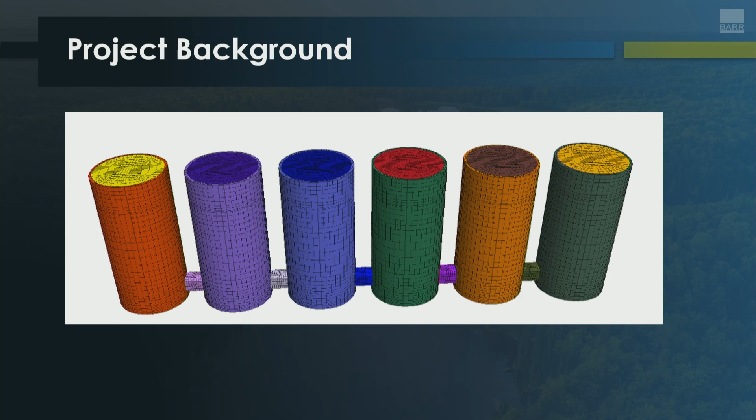So Stormwater Storage Facility, SSF, what is that? Essentially, this is a hydraulically driven project. Some of you may have heard this morning, another colleague, Brandon Barnes, gave a presentation on a project out in Valley City. He was a key component of this project team as well, but this was a hydraulics project in the downtown Minneapolis area, with the client being the Minnesota Department of Transportation.

So where is this project we're going to talk about? It's just south of downtown. You can see in the image here, downtown Minneapolis circled in the background. This is looking north, straight up the I-35W corridor, which is a major commerce and commuting corridor for the Twin Cities. Lots and lots of traffic on a daily basis.

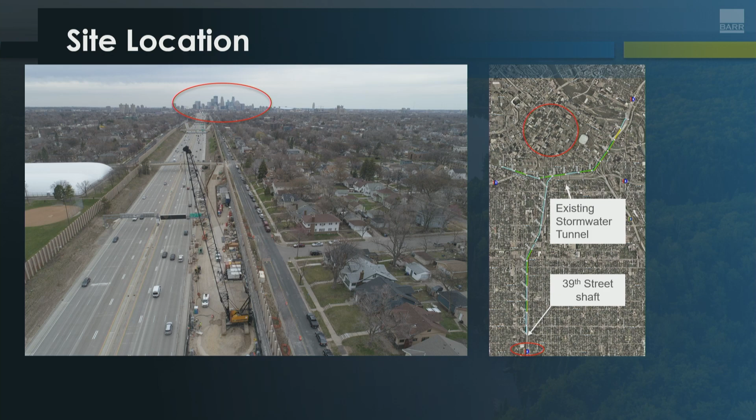How the system handles stormwater is, any stormwater is collected in a near surface system south of 39th Street, and then once you hit 39th Street, there's a series of deep shafts that convey through a deep tunnel out to the Mississippi River in a direct route. And so our project is just south of that 39th Street shaft, where there's a low area in the highway alignment. It's a very constrained space.

The great thing is that when you fly into MSP, if you're coming in from the northwest, you get a great view right down that corridor. Some pictures we've taken on the plane give you an idea of just what that corridor looks like. And then that picture on the right, that was during construction. This is a very constrained space.

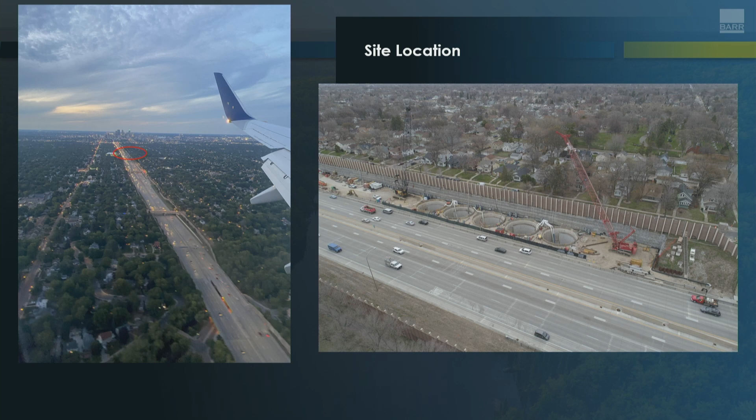But essentially the root of the problem was that this watershed drains during precipitation events, and under certain circumstances or certain magnitude of events, there is a potential for flooding along the freeway. And that flooding can bring highway traffic to a stop. This drainage area is a little over 5 square miles, and most of it can drain just fine. There's a piece where the project area is where we have issues with the amount of storage that's available.

And Federal Highway had told Minnesota DOT that they needed to have about a 10-year, 24-hour magnitude event storage. And we came up with a solution that was a little bit less than that. We'll talk about that, but it's important to remember this is a hydraulic project. On the left side here is the discharge out to the Mississippi River.

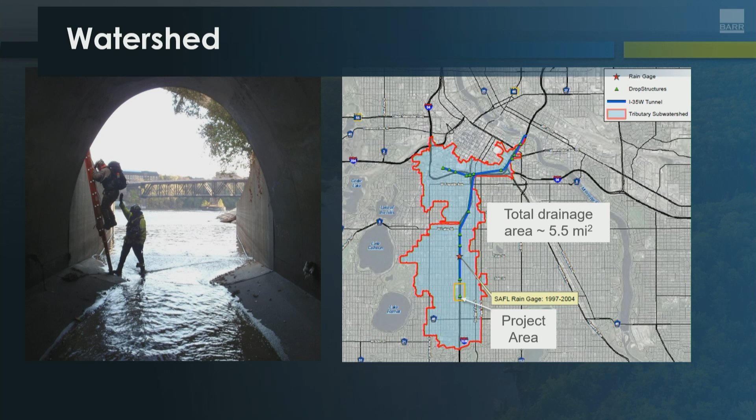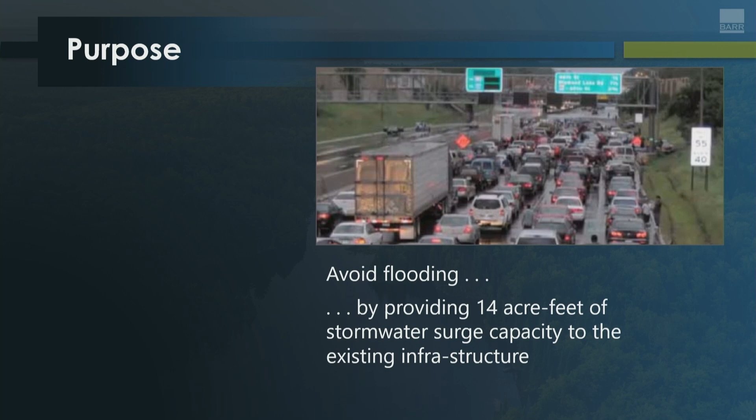And so what are the impacts of the flooding at this location? Total gridlock. And this doesn't happen all the time. It doesn't happen every month, but it does happen on a frequent enough basis in the past that it was a major issue. And like I said, the original intent was to have enough capacity to take a 10-year, 24-hour

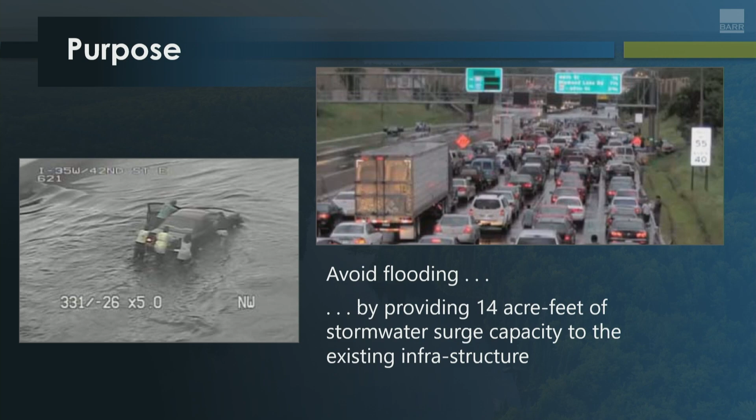event. What we did and what we came up with as a design team was to have 14 acre-feet of storage in place. 14 acre-feet is about 4.5 million gallons of water, or roughly a little over 200 swimming pools worth of storage. So the whole intent is to provide some of that storage capacity when storms hit in the right magnitude to prevent some of the impacts that historically have happened with traffic.

What this looks like in concept, this is it. You can't see it anymore, it's all underground, but essentially it looks like it's 6 sequential shafts that are interconnected. And when you look at it, that pipe that's in the median there, that's how current stormwater is carried to the north, to those deep tunnel shafts. And essentially there's a diversion that goes through the first cells. We'll refer to the cell on the south as cell 1, on the north as cell 6.

And so when water comes through under normal conditions or low water amounts, it passes right through that low area. It continues on in the median. But in storm events, what happens is when that water hits that first cell, cell 1, it hits an elevation that will go through a double-sided weir and spill over into the cells, the shafts, and essentially fill equally across the way.

So this sort of project presents a number of geotechnical challenges. A hydraulic project for the need, but there's a lot of geotechnical challenges, and there's a lot of need to understand how do we manage those things through design and through construction.

Minnesota DOT has a few different types of alternative delivery. They have CMGC, Construction Manager General Contractor, and they also have design build. And so on major projects, a lot of times they will assess what sort of delivery do they want to do if it's not going to be a design bid build. In this particular case, they decided to go CMGC. And the reason they wanted to go CMGC was because they really needed a team that could collaborate through options

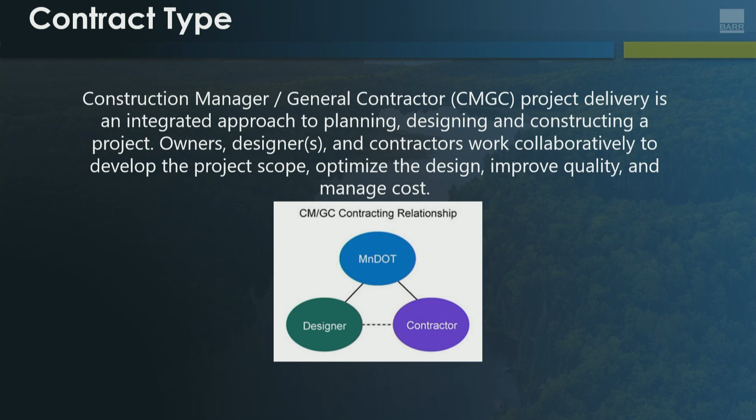So that was the delivery method they chose, which meant there was a very collaborative spirit. You'll hear the word collaboration thrown around a lot with alternative delivery. For the CMGC project, we had MnDOT as the owner. It was a joint venture of Kraemer Construction and Nicholson doing the contractor side and providing early contractor involvement. And then the design team, where the key partners were Barr and TKDA and Brierley Associates.

A number of third-party stakeholders had to be engaged with this as well, and not only engaged during the design process, but also some of the monitoring was to make sure we weren't negatively impacting any of the third parties adjacent to the project.

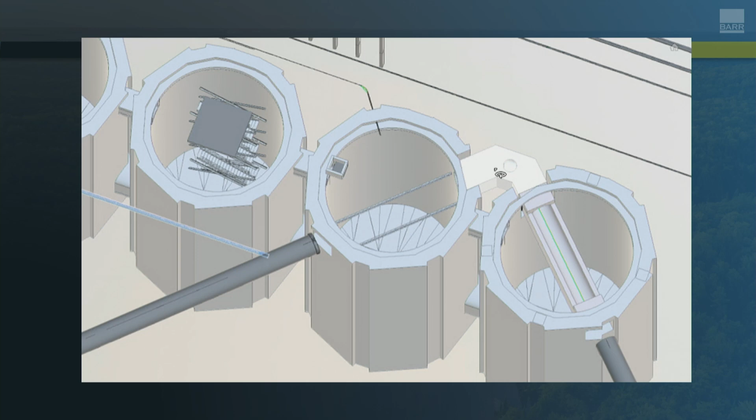These cells are about 90 feet deep, 42-foot diameter, and they were constructed through diaphragm wall construction techniques, which we'll talk about in just a second. And then they have an interior liner wall as well that was cast in place. So they're extremely robust, which Joel can show on some of the data too.

So as a geotechnical engineer, now that we've got some of the background, the other piece that's important to understand is the geology of the site and the geology of the Twin Cities and how that impacts control of risk, decision of constructability of the site.

So when you look at the typical layer cake through the Twin Cities, there's glacial drift, glacial alluvial deposits that occur up top. Then as you go down, the first bedrock you will oftentimes hit, not everywhere, is the Platteville limestone. Serves as a great competent layer when you first go down. And then beneath that limestone is a thin layer of Glenwood shale, which is an aquitard, and then you get into the St. Peter sandstone.

And when the cities of both Minneapolis and St. Paul were first developed, that St. Peter sandstone is heavily, easily erodible. It's very strong in compression, but very easy to carve out or to mine or to dig tunnels in. And so when the city started to get built up, it was very elevation, gravity beneficial to handle stormwater, to dig out tunnels and have those come out to the Mississippi River. So most of the stormwater drainage systems in the Twin Cities are like that.

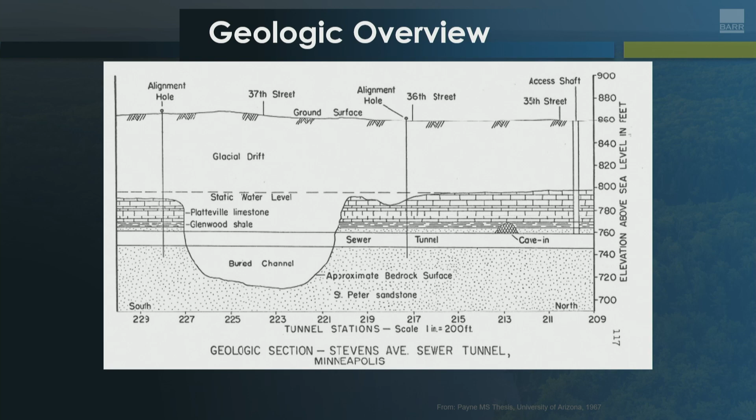But a couple of the things that are important is that where you construct in the St. Peter, when that Platteville's there, it serves as a good carrying unit, but you get these glacial carves, these valleys. And when you get the valleys, you get intermixing of the groundwater table, and you get some different soils than what you expect that drive a need to identify that.

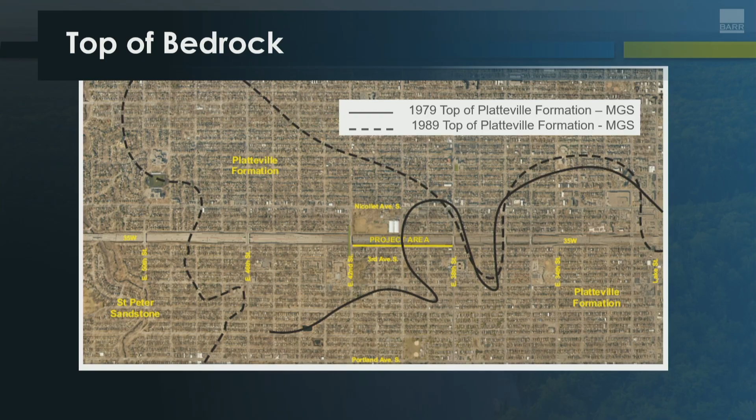And what we had was from '79, we showed that the top of the Platteville limestone came right through our project, and then that map was revised. In '89, it showed that all of our project area would have that Platteville limestone. And so when we did our geotechnical investigation, that started to dictate what we thought we were going to see and how we are going to shape out our cells.

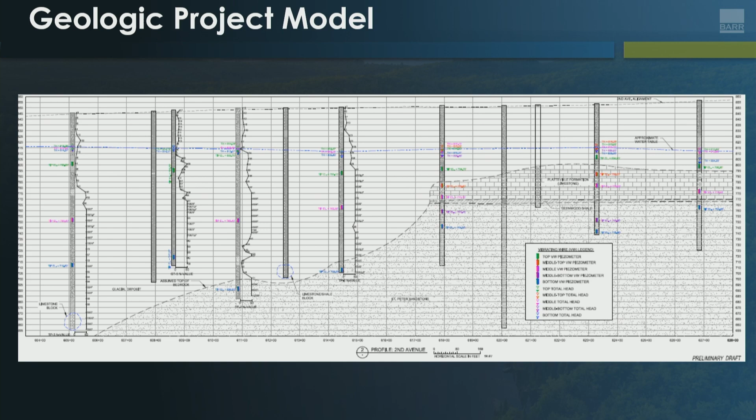So we had very high groundwater table, and dewatering this to completely dewater the excavation or whatever it was going to be was extremely impractical. So we knew we were going to have to construct in a high groundwater table.

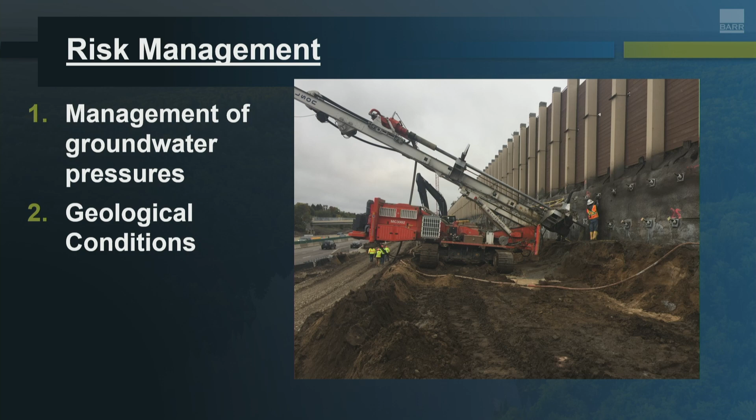There's a number of different things with regards to this project we could talk about for risk, but the two that I'll lay out and kind of set up some of our instrumentation is management of the groundwater pressures. Like I said, high groundwater table, we weren't going to get rid of it, totally impractical, too cost prohibitive, and then the geologic conditions and how that impacted the constructability or the construction technique we used.

Excuse me, this is a schematic of the different steps of construction. So when we were talking with the contractor, we did decide early on it was going to be some form of diaphragm wall construction. All that is, it allows us to build from a platform, dig straight down with a large cutter head, and then slurry that in place and essentially create the walls underground. Serves as a cutoff, and then we can excavate out the interior soils.

But along the way is control of the groundwater pressures as we go. So high groundwater table, you can see on stage 2 there, that's really building the diaphragm walls from the surface, so those are in place.

And then when we get to stage 3, we wanted to put wells in to depressurize, not completely dewater, but depressurize to a point where we could control excavation and sequentially do that in a safe, effective manner. Phase 4 is when we're doing that sequential excavation. And because of the risk on this project, there were some terms written right into the contract that required the contractor to achieve a certain amount of depressurization before they could continue along with their excavation. So that was one way we were handling risk.

Stage 5, we get to a point where those wells are turned on, and we really need those to be on constantly before we get to the bottom of the excavation. As I mentioned, the cell open area is about 90 feet deep. Those diaphragm walls are about 110 feet, so we had a bit of a cutoff effect on the bottom that we were utilizing. Get to stage 6, that's our critical point in the project from a risk standpoint. At that point, the wells have to be on. If the wells are not on, we lose control of the hole. We would have heave in a very quick fashion at the bottom of the hole, and so there were a lot of redundancies built in there.

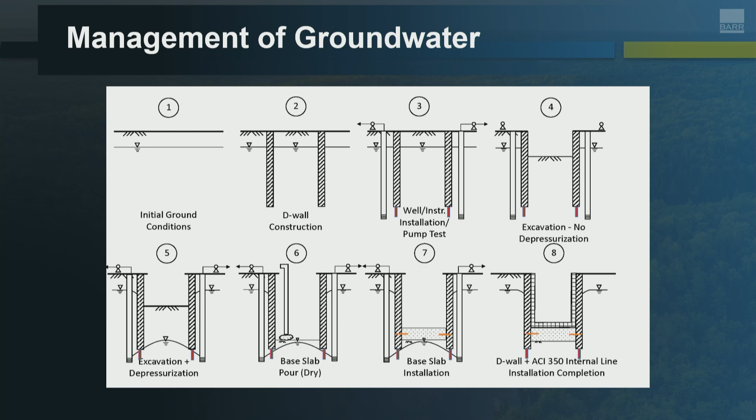And then stage 7, we cast in the slab that structurally supports those pressures. And then 8, we come up with some liner walls. So that was the sequence of construction. But knowing how the water was behaving during all those things was incredibly important. So what do we do about that?

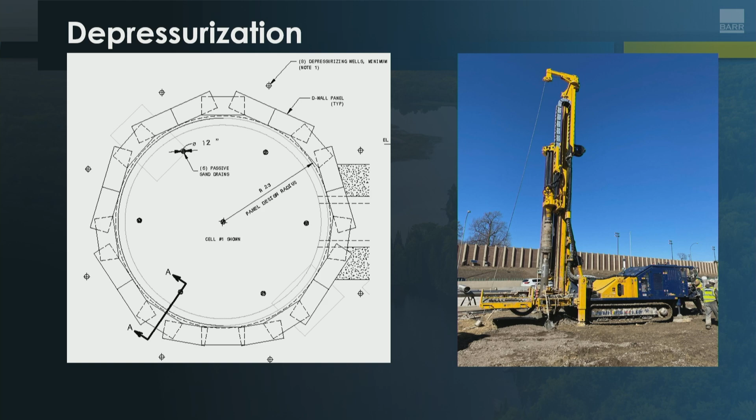We had a system of depressurization wells. And so after the diaphragm walls were installed, there were wells put along the outskirts of each of those cells. And then we had a number of pump tests, and the contractor was required to perform pump tests before excavating to show that they were performing. They did have to redevelop some of those wells along the way, and on some occasions we had to add another pump on the interior of the cell just to create enough control for the contractor. But this was discussed ahead of time.

Once the wells were installed, there was a need, because of the risk component, to make sure we had online backup power, so that if there was ever a storm that knocked out mainline power, there's an automatic switchover to generators to be able to power these things and not lose the construction at a critical point. That was all identified during the design phase and then costed out by the contractor and the owner together through their costing process for that delivery method.

Specifically for the depressurization, I mentioned we had that in the contract. It's the first time I've seen that, where we had specific depressurization goals that the contractor had to show that they met before they could continue with their excavation sequencing. So everyone was extremely interested in the instrumentation of the dewatering, and we had a multitude of vibrating wire piezometers at the tips of these different cells, so we had redundancy in the system, and then we had the data actually hooked up so it could be viewed externally by all the stakeholders, and there were times when they might lose just one pump or something, and we might see it on the monitoring before they realized it on site, just because the response was so fast given the amount of head there.

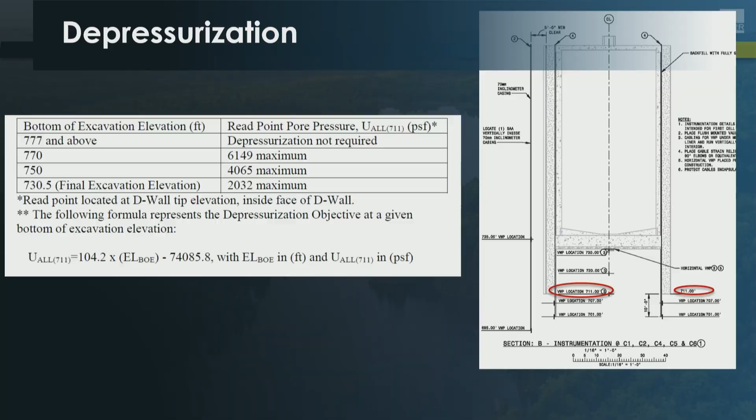The truth test was when they got to the bottom. This is a picture of when the bottom was completely excavated out, and the floor was not in yet. And so, as an experiment, the contractor wanted to see how fast the water comes up if some of the pumps start to lose. And they had control and they had redundancy, so we could do it in a controlled fashion. And I would say it was probably within 20 minutes you could start to see water seep up. So they turned the pumps back on. It gave everybody a good sense of what sort of time they were looking at, and it was a great test to confirm what those risks were and have the instrumentation tell us everything that we thought was happening was indeed happening.

So then the other thing was the ground conditions, and how do we fit these cells into the ground in a meaningful way and have a construction sequence that allows us to manage that. You can see from the aerial drone footage, this was immediately adjacent to live traffic, and there was a major construction project going on adjacent to this one, and so there were a lot of interactions between those projects.

Early on through the design phase, the contractor identified, and we talked about whether we wanted to have shared walls between the cell walls, because you can do that. We made the decision to not do that because it would allow us to sequence more effectively as we jump from cell to cell without having that longer cure time and some of the limitations if there was a little bit of differential settlement. It wouldn't put as much risk back into what a shared wall would be.

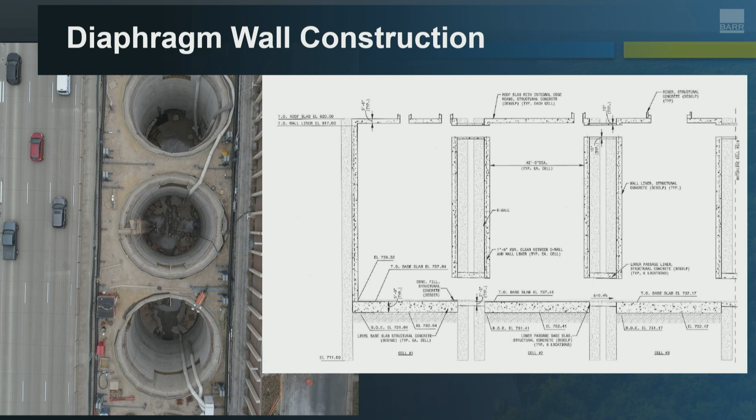So the decision was made, separate them all so they're independent structures, they can carry the stresses of the soils fairly well, and what that meant is we had to make connections between those cells, and we had a connection at the top and a connection at the bottom. But before we even put in the diaphragm walls, that meant we had to jet grout. So the contractor came in and jet grouted to try and precondition the soils, and then once the cells were constructed, we hand dug between one cell to the other. That was an efficiency, a risk control that was identified through the design phase.

The diaphragm wall construction was really done through a couple of techniques. There's a clamshell bucket, where you can pick up softer soils and excavate, and then you have a hydrofraise, which is multiple cutting wheels that will actually grind away at denser material or rock, and then you put a slurry in. Slurry holds the slot open, and then you can tremie pump concrete in there to create that exterior wall. And so those are the methodologies used.

It worked out great because it allows us to work from above that groundwater table, but get a high level of control on the type of concrete that we're using and the curing of it to know that our walls are going to be good.

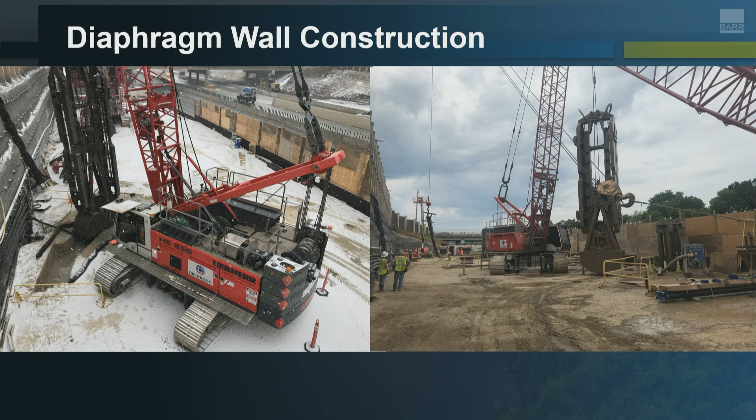Side note, COVID hit in the middle of this project. The crews that operate the hydrofraise are very specialized and there was a little bit of a delay on the project because one of the crews was in Europe and could not get back to the U.S. to work on the project.

But to give you a sense of what this looked like at the bottom when we made those connections, you can see some of the jet grout on the left. So jet grouting, we're drilling down and injecting grout before anything else is done to try and solidify the soil and create a little bit of a water cutoff. You've got to remember, there's about 80 to 90 feet of head above where this is at. So we didn't want to have the diaphragm wall in place and then poke a hole in it and lose all this ground. So that was the reason for the preconditioning. But we were able to punch through successfully, control the water inflow, and then do cast-in-place connections.

The other thing that was a part of this project was, you see these openings, they're about 10 feet wide. Oftentimes you get sediment in a storm structure like this. So we worked with MnDOT maintenance to identify how we can get sediment out in the event that it comes in there. So all the floors are sloping to the middle, and then for all of the 6 structures, there's a slope that goes to the north. So we're trying to consolidate where any of that sediment would come. In the event they needed to, there's access. You could drop an electric or gas-powered skid steer in there, and those widths are there to allow for passage of some of that maintenance equipment.

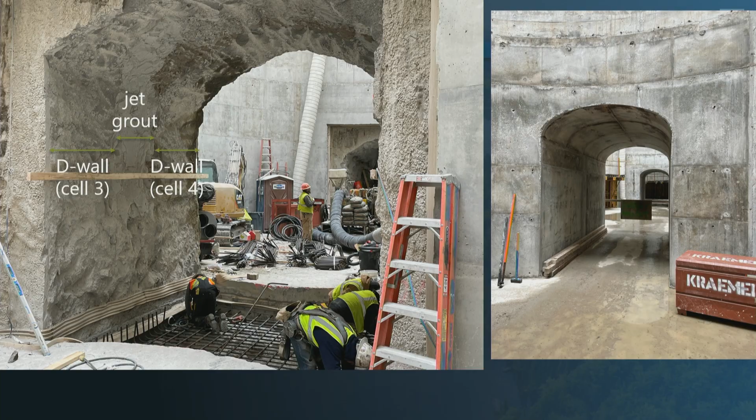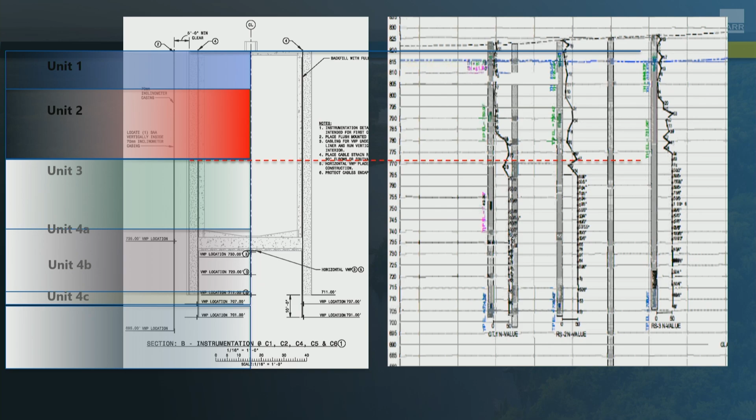And then beneath that, we got into much stiffer alluvial soils. And so that was the identified transition to go into the hydrofraise and do the excavation with the hydrofraise at that point. And that allowed the contractor to figure out what that efficiency was going to be, what the costing was going to be for each of those things. And that concept model carried all the way through the costing exercises and the risk. Along with that was trying to identify, are there boulders in there?

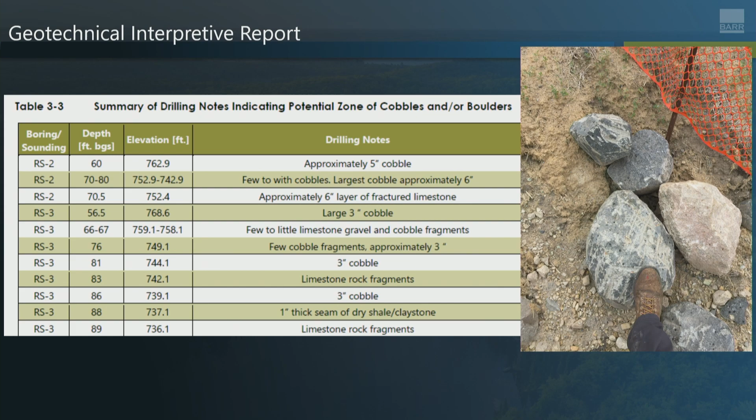Even with all of the best planning, there's still things that come up, and so how do you get through that? So those are two of the things from the standpoint of risk as far as conditions encountered and conditions planned for and designed. What did that mean on the contract side, especially on CMGC delivery? So this was a diagram we worked up just to try and lay out how it was handled on this particular project. And you can see on the investigation side, or RID, reference information documents, all of our geotechnical information, some of the baseline monitoring that was done ahead of the design that was available to the contractor, and then there was a risk registry process that was run through during the design phase that fed into some of the costing exercises the contractor did.

So then when you get into the contract itself, for this particular project, we did a geotechnical interpretive report, much like a GBR, but really that was to define some of the things that were anticipated to be in the ground for the contractor to use, and this was done collaboratively with the contractor, but it became a baseline for their costing exercises or triggers to, say, open up risk allocation dollars if they hit unexpected conditions. We tried to include things into the special provisions, like the pore pressure requirements, and then during the costing exercises, the contractor and the owner would go through the risk pool items.

And then when you get into construction, yep, there's still a possibility of a differing site condition. When you talk to a construction lawyer, they'll say differing site conditions and unexpected utilities are two of the biggest items for claims. So there's still a mechanism to go through that, but ideally, we've handled it through a bunch of different ways. If indeed there is a differing site condition, then there's a way for the contractor to handle that. What we've tried to do in this particular type of procurement is define triggers so that if something is exceeded, a ground condition, boulders, let's use that as an example, that then is an agreed upon item before construction to say, yep, you're exceeding this, that's going to open up some of the risk allocation dollars. And then eventually you still have options to go to a resolution of a claim like arbitration.

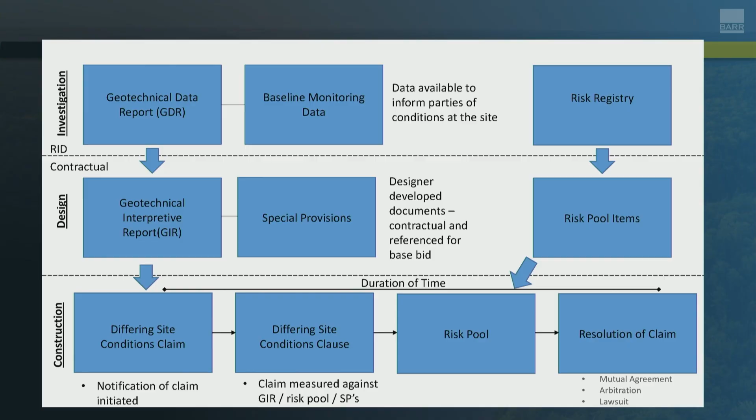But I could say on this project, what happened early on was a really good spirit of collaboration. There's certainly challenges during construction, but that collaboration carried through on the construction to make it successful. And so those are some of the things we did to manage risk on the design side leading up into construction. And my colleague Joel is going to talk about a lot of the instrumentation that was implemented during the construction of the project.

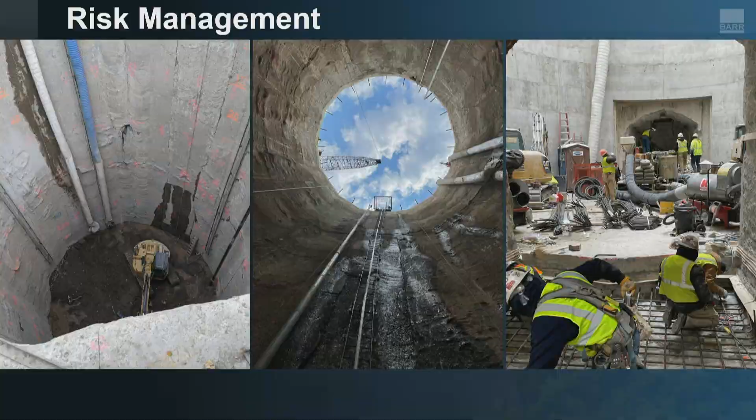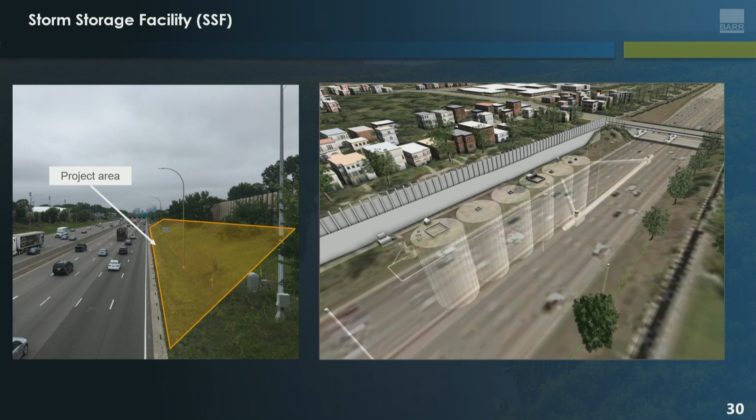So a dewatering project, as some of you may know, can influence not only your project site, but a long ways away from your project site as well. So starting with this, one can start to think about sensor selection, reporting frequency, and how to visualize and how to analyze that data.

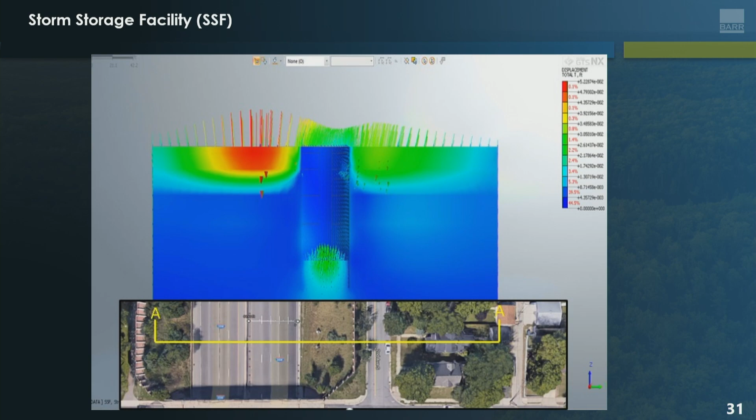So how does one monitor a soil nail wall during construction? Because you've got to build the wall and monitor at the same time. So with that, there's monitoring prisms across the sound wall. And then as the soil nail wall is installed, we're putting sensors on soil nails as they're going in, and then prisms on the concrete face.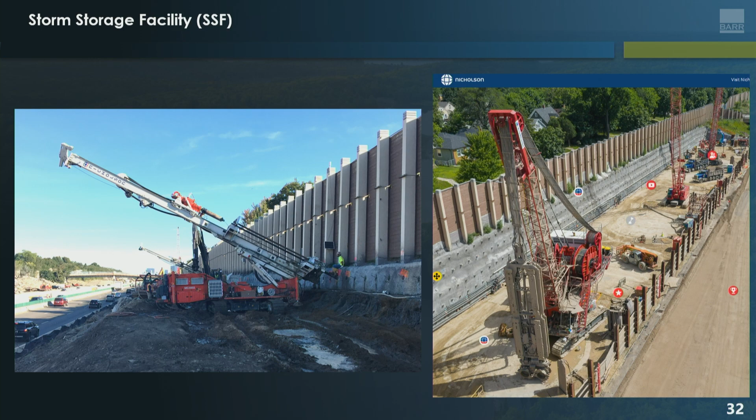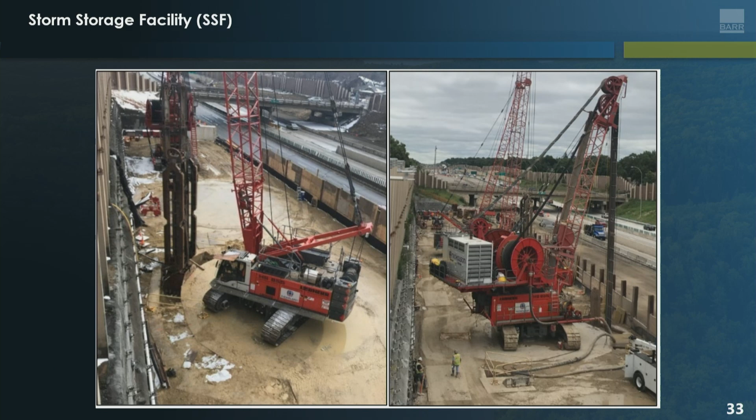One thing to note here, again, I'll touch on this. This is one of Mike's photos from earlier, is the distance between the Hydrofraise in the left-hand photo and the base of the soil nail wall. There's not a lot of space there, so I'll come back to that in a moment. So looking top down, I'll start referencing the photo on the right for the purposes of the diagrams we'll be showing you next. So looking at chamber 3, it was my favorite chamber, if I had to pick one. There's a lot happening here.

So in the middle photo, you see it's a black and white photo. You can see the soil nails extending under the street, 2nd Avenue, going left to right in the right photo. There's 3 horizontal cylinders in that image, and those are utilities, gas lines, water lines, and such. So in our analyses in the design, you're allowed deflection within the soil nail wall itself to budge, to move laterally about 1 inch.

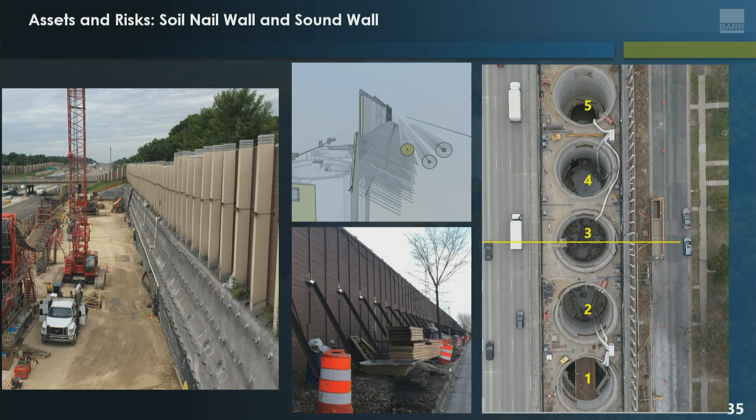Well, if you go further than that, you can take out those utilities at the ends of the project because they become under strain. So how do you watch for that? I'll start to show you some information on how we did that, but it's a consideration. So again, if that soil nail wall were to move, we'd have a lot of problems. So a slice through chamber 3, I've got a diagram on the right. It's really busy, so just work with me on this.

The yellow dots up on the top are the survey prisms we measured for displacement. The vertical blue line is a shape array. It's an electric garden hose with a bunch of cell phone sensors on it, essentially, to measure tilt. So you can measure how much the ground moves. And then the blue dot in the bottom of the chamber is those vibrating wire piezometers that Mike talked about. And they measure water pressure in the ground. So with those three items, we can start to measure the impacts of what the construction is doing.

So you get a very confusing plot like this, but hang on. There's a gray box highlighting when the soil nail wall construction was occurring, starting back in September 2019. Then it gets to that first white box. But right at December 2019, you'll see a lot of those black lines go vertical. And what happened there was in that small space I talked about earlier between the Hydrofraise and the bottom of the soil nail wall, the contractor decided to install sheeting to stiffen up the soil there as the Hydrofraise is going to come in and start removing that ground.

Well, that vibratory installation of the sheet piles caused a lot of horizontal displacement. I got the red arrow there to show you where the design limit was for lateral displacement of the soil nail wall. So they shot right past that, up to 4 inches or 5 inches. So the top two lines that are more jagged are the prisms. The two bottom lines, or there's three SAA lines, there's segments along there. And you can see how that wall really wanted to take off to the left.

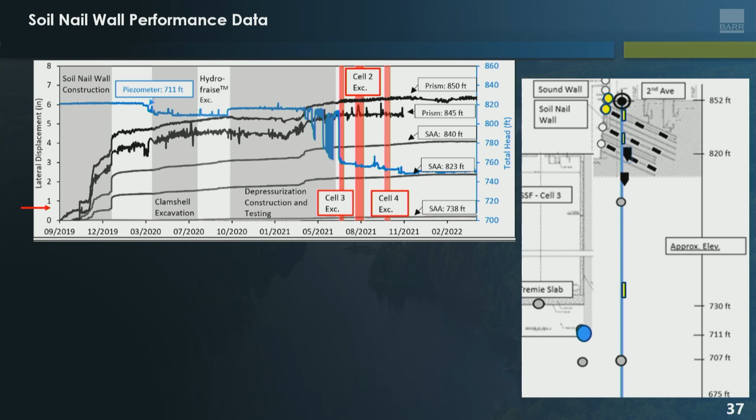And then the next component to this cross-section was instrumenting those soil nails that went behind the concrete soil nail wall. We could put strain gauges on those sensors as they're installed, and they're grouted in place. So you got little bathroom scales on those tendons. And then I got some green dots there showing some other vertically placed, I'll call them earth pressure cells, but bathroom scales essentially too. You can feel the pressure of the ground.

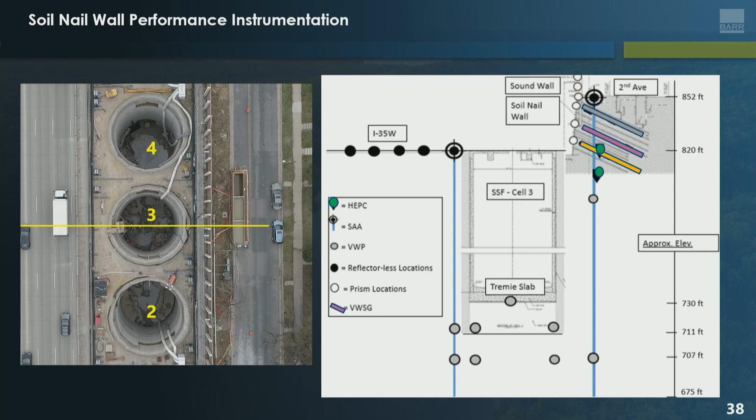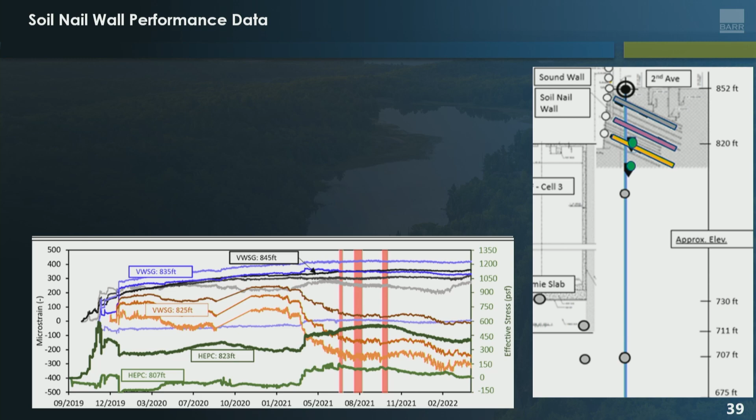So I'll explain why it's on the bottom of this plot in a second, but essentially what we could see at that December 2019 timeframe is that when the contractor decided to install those sheeting, we could read this data and understand that the wall actually was going along for the ride. So it was very, very powerful to install or vibrate the bottom of a retaining wall in an active construction site. So when you start to place that data on top of the previous data, if you have perfectly lined up axes, a story starts to be told. And this is where the power of instrumentation and monitoring really comes out. You can start to explain things that you'd have maybe seen as a crack on a wall or a crack in the soil.

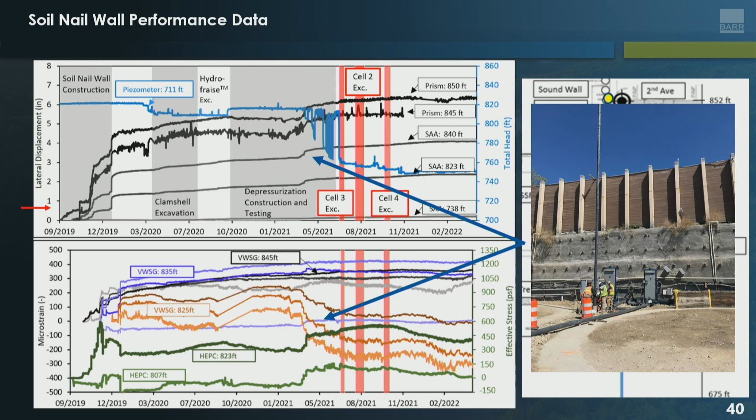So without getting into too much detail on this, but it's very interesting to me, is that the picture on the right was a dewatering well. And they're having troubles with getting it installed. So again, some more vibratory work was happening maybe 60, 70 feet down in the ground, and that still showed up in the upper plot. I got the blue arrows radiating from that photo to the points in the plot showing, hey, there was still a ½ inch of movement from trying to install a well or develop a well 70, 80 feet down, that would manifest itself up in the soil nail wall. So in vertical walls like this, it's very challenging to not disturb it if you're going to work at the toe. So some lessons learned out of this was be very careful when working at the toe of the wall.

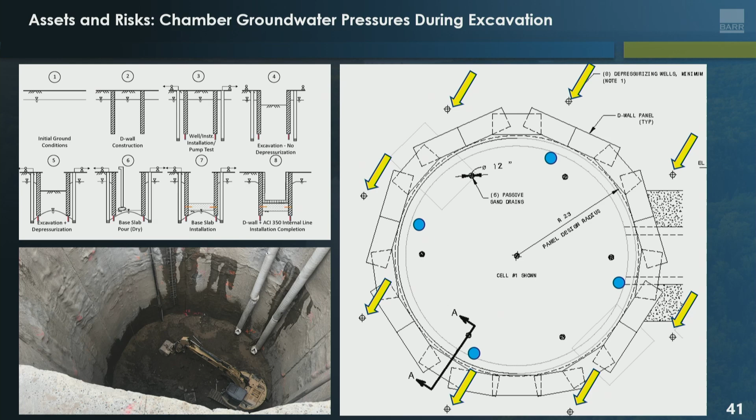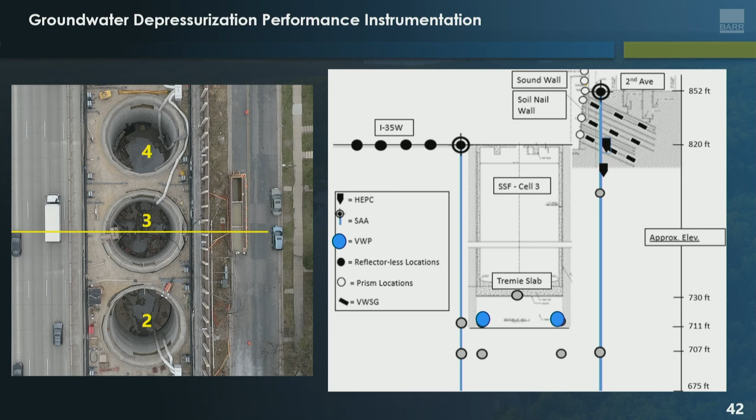So that was the soil nail wall. The next spot was the depressurization program that Mike spoke about. Each of those yellow arrows points to a depressurization well, and then within the chamber, we had installed our vibrating wire piezometers with cabling and such, which is a challenge in itself. So for the sake of this plot, there's two blue dots on the bottom of the screen showing you some depressurization results from those sensors specifically. And as Mike talked about, it was a contractual obligation for the contractor to make sure they met these depressurization goals. But you can see from the plot for the first pink zone, the cell 3 excavation, they had played with the depressurization program a little bit beforehand, but when they started getting after excavation in cell 3, they just lowered it and kept it there the whole time. So they met their goal through the duration of the project.

And then what's really neat is you can start to see around the middle of the plot, you start seeing black spikes pop up. The biggest one in the middle is where the contractor decided to do the field test to see if they could get in the basket fast enough before liquefaction took off on them, as they started watching the water come up out of the ground in 20 minutes of it being turned off. But this was the most watched component of the program, as it did have the most immediate impact on the contractor's health and safety.

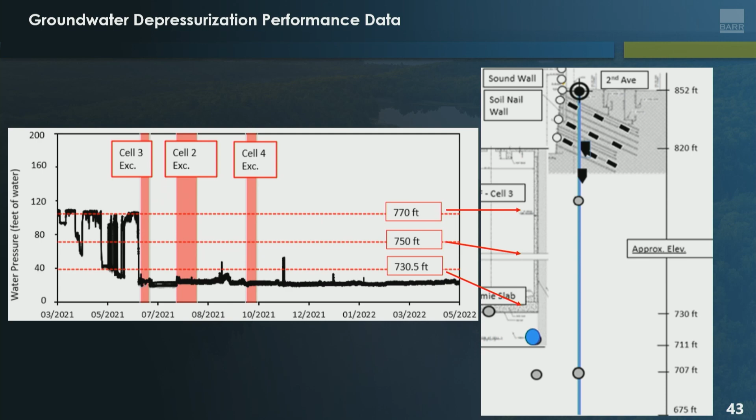So now we're looking over to 35, the actual interstate in use. So the challenge with 35 was that if the contractor encountered boulders and such, or other unforeseen conditions that could cause trench collapse, or if they had a loss of depressurization system event, you could have a loss of ground under the interstate. And then you need to understand how bad is the interstate impacted, and should they shut it down?

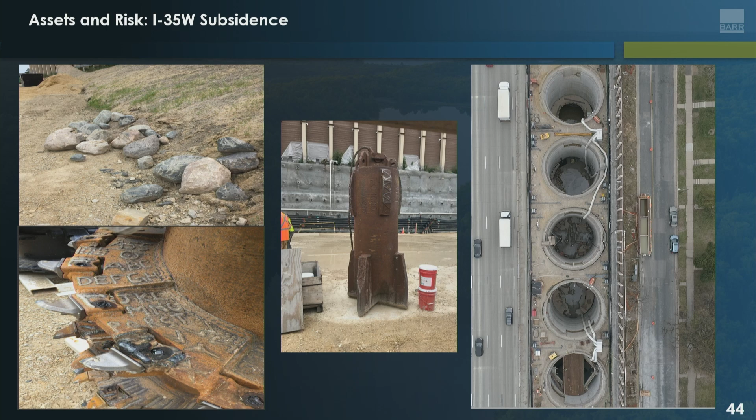So we monitored where the traffic is moving. See the right-hand side photo there with the trucks moving north. We measured that with automated motorized total stations as well. And in the middle is one of my favorite pieces of equipment I saw on the site, and that's a chisel. So when the clamshell would encounter a boulder within those deep excavations or the Hydrofraise, they'd get the chisel out, which they just drop into the slurry to pound up the boulders at depth, and then they could chew it up after that. So, novel approach.

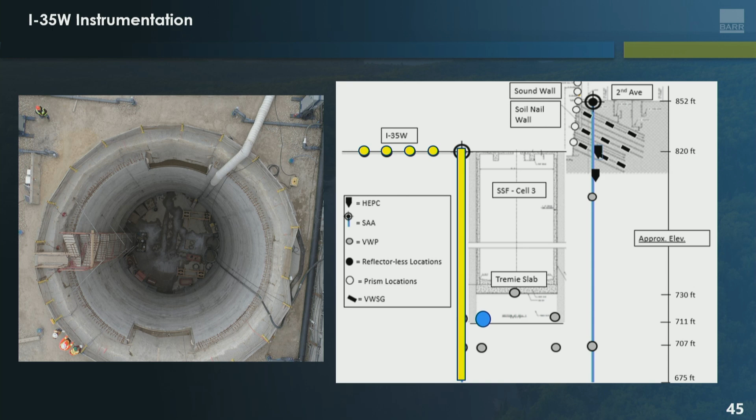So starting to look at the 35W, you see the yellow dots on the left-hand side. Those are reflectorless pavement shots using a total station. And then I'll plot that next. And the vertical yellow line is another one of those shape arrays adjacent, in between along the shoulder line of 35. So a concern here was that the different types of excavation processes could have resulted in that ground loss, but we wanted to see if one was better than the other.

So the first gray box on the left-hand side of the plot, that's clamshell. You could see that the black lines didn't show much movement. We had maybe an inch of movement in several spots along some sensors. But the Hydrofraise, when you get about halfway down, they would use that tool, and that would be more of a grinding technique to excavation, and that showed substantially more movement in the ground in the sensors adjacent to the excavation. So that's pretty interesting to see.

And then as you moved along through the depressurization program, we could see that right about the first red box where the pink line is, when they dropped the water, there wasn't a great amount of influence in the lateral displacement of the system. Now all the stuff in the middle is the sensors jostling around in the hole adjacent to the excavation, you get a lot of noise.

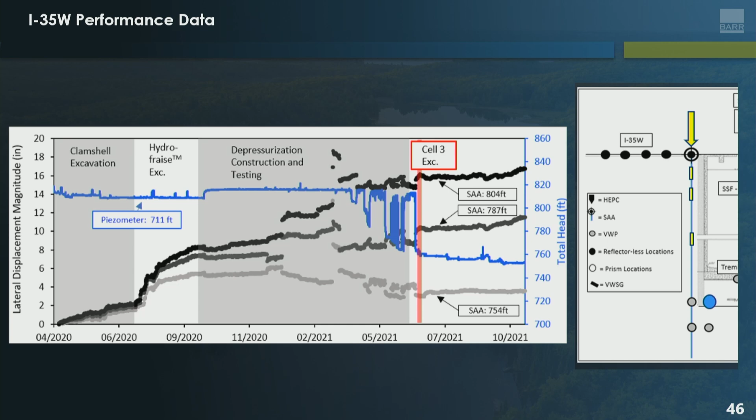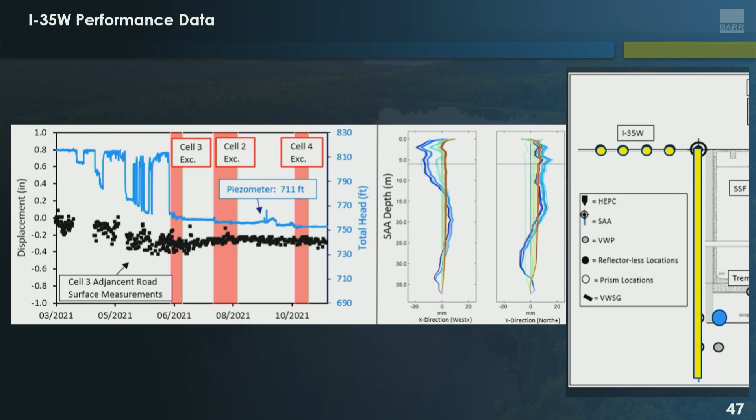But then we can plot up the black dots on this plot to show how much the interstate actually lowered due to the depressurization program. And you see those are charging and trying out the system. They were causing settlement within 35. But as they would turn the system back on, as the blue line would go up and down on the left-hand side of that plot, the ground didn't rebound, it stayed down. And it continued to stay down throughout the project after they lowered the groundwater. So 35 lowered about a quarter inch or so from this drop in the water in the depressurization program.

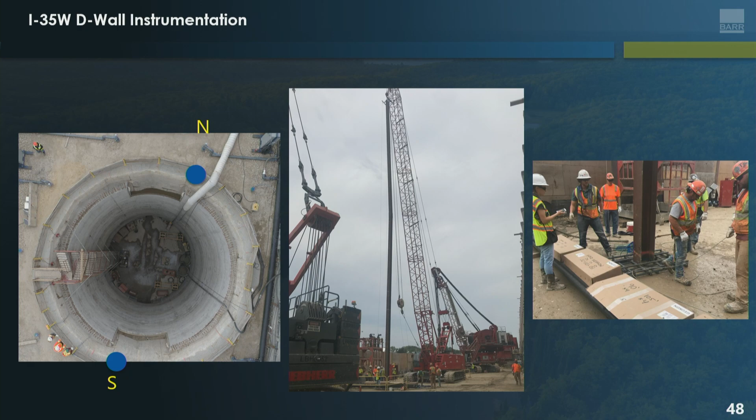So during the design, the concern was that if you're excavating one cell adjacent to another cell that's already got the D-wall installed, the ground might want to rotate or lean out towards the excavation and thereby cracking it. We're constructing water holding facilities, and we don't want our facilities to crack. So what this was meant to do was investigate how much cracking will occur, or may occur, in those diaphragm walls in each chamber.

So imagine with me, we're looking at a time when both cages are installed into the ground and the concrete has been poured. So now they're just sitting there and the ground has not been excavated in the middle of the chamber. So as we start clicking through time, I'll show the schematic as the ground lowers to see what the stress changes are through color contouring. So the groundwater pressure drops down about 80 feet, and we can see a max microstrain about 30, and 30 is a very small number. And the other plots are showing hundreds.

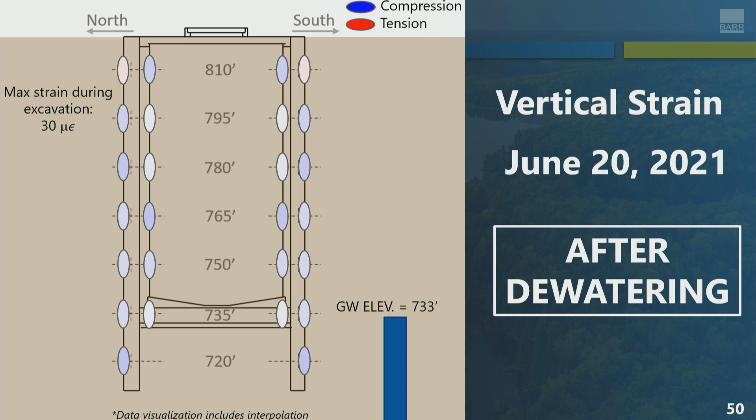So then we start stepping through, you can start to see that the inside of the chamber is in compression. The outside of the chamber is in tension. And each chamber is about as wide as one of these panels I'm standing in here, about 4 feet. So you step down again, you get more compression up top and more tension on top. And you get down to the bottom of the excavation, it's got about 30 microstrain. It's not a lot. So a lot of that hoop stress is really small within the chamber itself because you're trying to squeeze an egg.

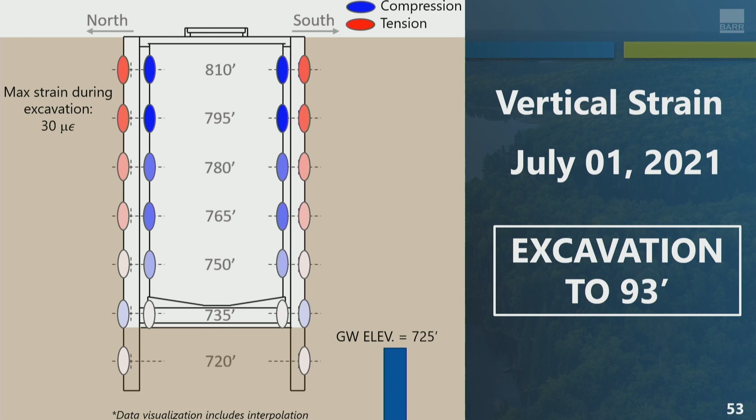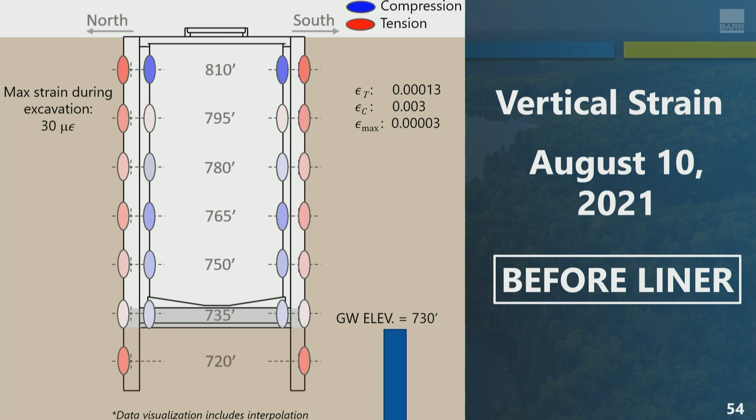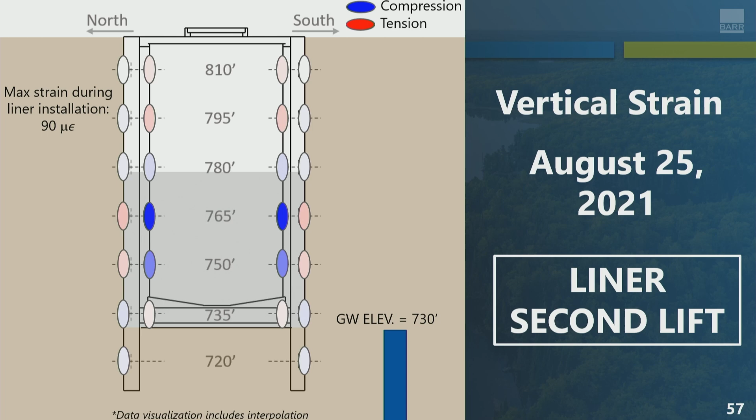So then before the liner, we might not have touched this earlier, there is the diaphragm wall, and then inside there's an additional liner constructed. We called it the ACI 350 liner. And that was essentially a curtain hung on inside, or doweled and poured in place, but inside the 4-foot wall. So we can start backing up. When you start putting that on, we can start seeing this compression, again, develop within the chamber as you stepped up. But all in all, the max strain during all this is 90 microstrain, which is very small.

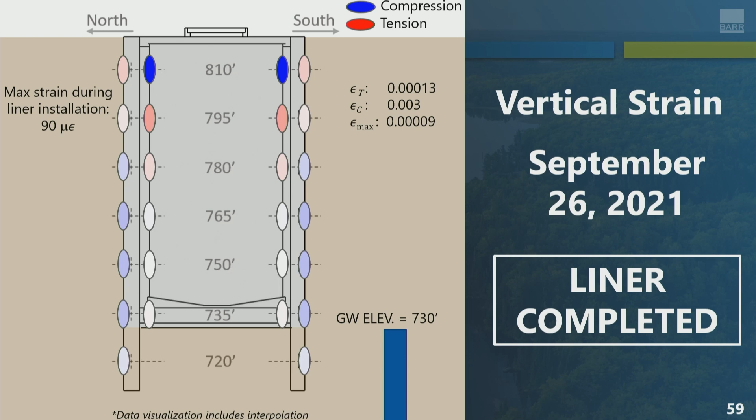So in conclusion, the SSF was constructed to minimize stormwater impacts in 35 and those risks that come along with it. The assets monitored were a soil nail wall, the sound wall, and then the utilities behind there. We saw that working at the toe of that soil nail wall and with vibratory equipment can really impact performance of the soil nail wall. The groundwater depressurization program was the most sought after and simplest component of the project, but that one had immediate impacts should it have failed on the contractor. So if it's one thing we got called on, it was, hey, can you explain what's happening here with the depressurization program?

The third thing was excavation of the chambers did not impact one another laterally, and the groundwater depressurization program caused about 1/3 of an inch of fall in the 35W roadway. Otherwise, the D-wall vertical strain system that we had set up to monitor performed extremely well, and it's really interesting to see something that's not done very much in the world.